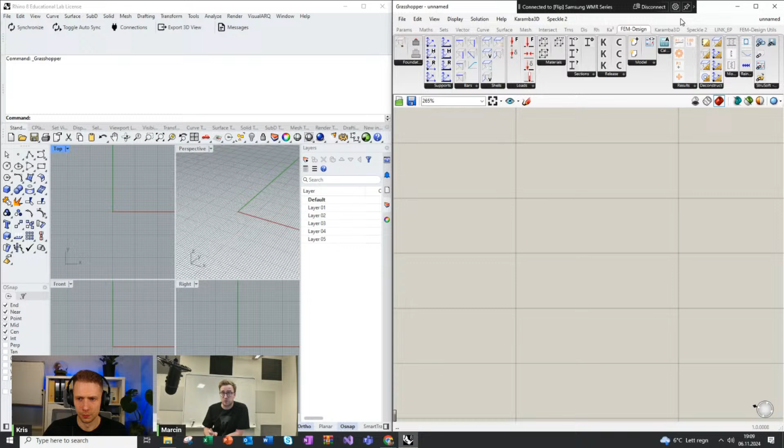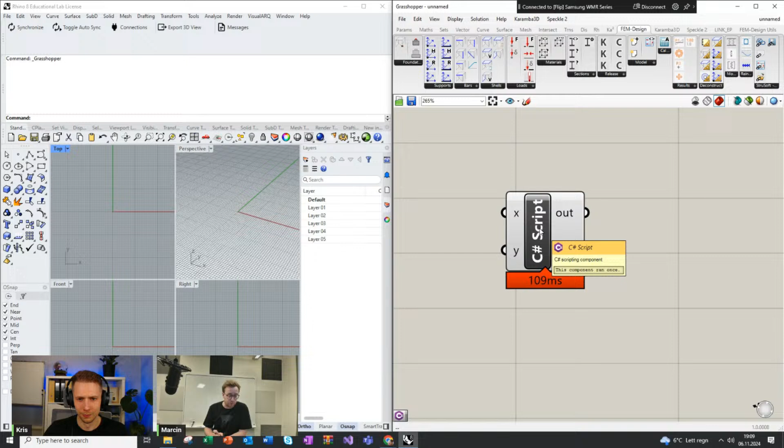Generally, you should not be afraid of creating code in Visual Studio. Probably some of you have been trying C# scripting or Python scripting from Grasshopper. I think the Visual Studio environment makes it much easier. So in fact, you will probably fall in love with doing it from Visual Studio, because Visual Studio in the new version is also learning your style of scripting. So after some time, it will try to suggest the correct command, which you can approve with the tab function. I will also show you that.

But let's maybe do it right now, step by step. So I will just close Rhino 8, close Grasshopper, of course, and I will just open Visual Studio. As Kris was mentioning, I hope all of you have installed Visual Studio. Since I am using it quite often, I tried to clean Visual Studio and Rhino of unnecessary plugins, just for the

purpose of this workshop. So generally, when you are starting Visual Studio 2022, it's highly recommended to run it as administrator. In my case, I could just click it because in the properties I marked it to always open as administrator. But remember to do it, because we will be saving the Grasshopper plugin file on our C drive, and to do it, we need administrator rights. So I will click it, and Microsoft Visual Studio 2022 will start to open.

Obviously, you don't have this part because these are the elements which I have, but probably all of you have those options on the right side of your screen. And what we want to do today, we don't want to clone a repository from GitHub or open a project which we don't have. We just want to create a completely new project. I hope all of you managed to install the extension for Grasshopper.

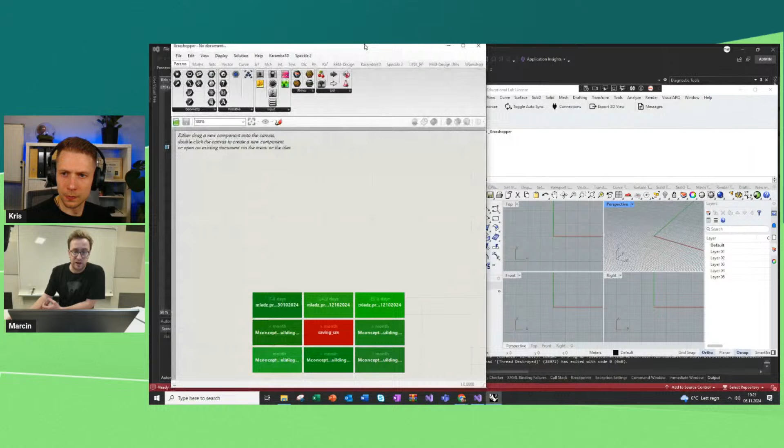If I click it, Rhino 8 will start to run. So you see diagnostic tools have appeared in the place of the Solution Explorer, and we see how much memory we are using right now when we are using Rhino. Rhino and Grasshopper are starting automatically. I'm not clicking anything right now. We are just waiting until it opens Rhino and Grasshopper. And what we also see is that we created our first ribbon. So the ribbon Workshop and Test is bringing us the Kris Workshop Component 2024.

So we already have something. And maybe it's not very meaningful and it's not having any input and output, but we have something. So exactly. Good start. It's a very good start. It's like the rocket has started. We don't know where it is aiming, but something is happening. We can celebrate already. And the display button in Visual Studio, it's because of the extension, right? Yes, it's because of the extension.

And then we don't see the icon, like the others have very fancy icons. I'm not sure if we will show it today how to do it, but it's also not so problematic to do the icon. But generally, let's try. Oh yeah, one thing. As you can see, we have also workshop test. So if I go over here, we see that the nickname is workshop test.

So generally, if I change the display into not draw full names, but the short names, then we have the workshop test. Okay. So if we change it, then it will change it also here. So I will keep to the draw full names. I like to keep it when I'm teaching people because the full names are there. So the workshop is the ribbon name. The test is this name here, test. And the Kris Workshop Component 2024 is of course the name of the component.

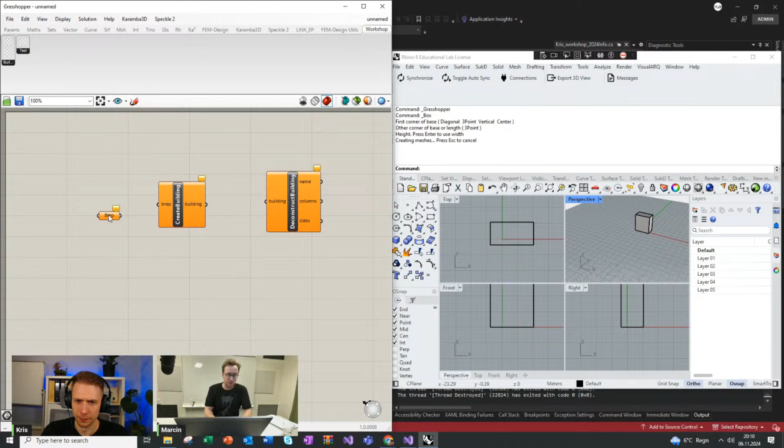And then if we go for the workshop, we see that in the building we have create and deconstruct building. So we have already 3 objects in our plugin. Let's go for the first one. We need some kind of input. So I will just create some kind of box. It's a brep, definitely. I will go for an easy one right now. I will set this brep and bring it to my building. And it's not red, so that's very good information.

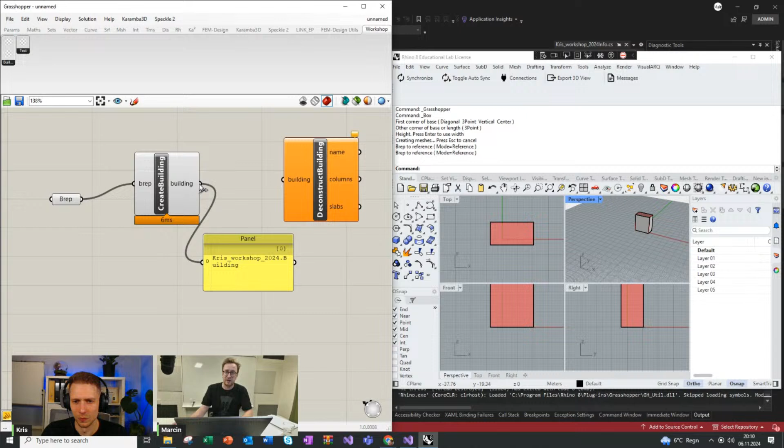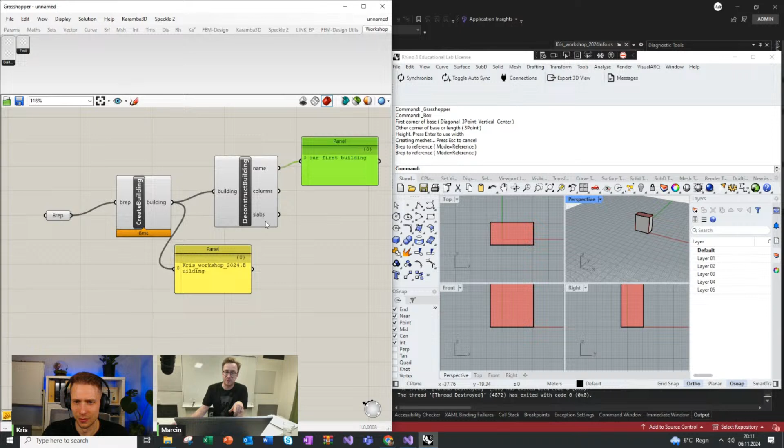What we can see in the output, it's also not a brep, but this is a Kris_workshop_2024.Building. So it's the first class name with the Kris, I suppose. So now if I go for the building and go for the deconstruct, it even works. As you can see in the name, you see our first building. You don't see any columns and slabs, obviously, because we didn't manipulate the geometry yet. But the goal today is to make the columns and the slabs automatically from the brep.

So right now, it should be quite easy to understand what we want to do. Sorry, it took 1 hour to present you the goal of the workshop. But yeah, I think it's quite clear right now what we want to do.

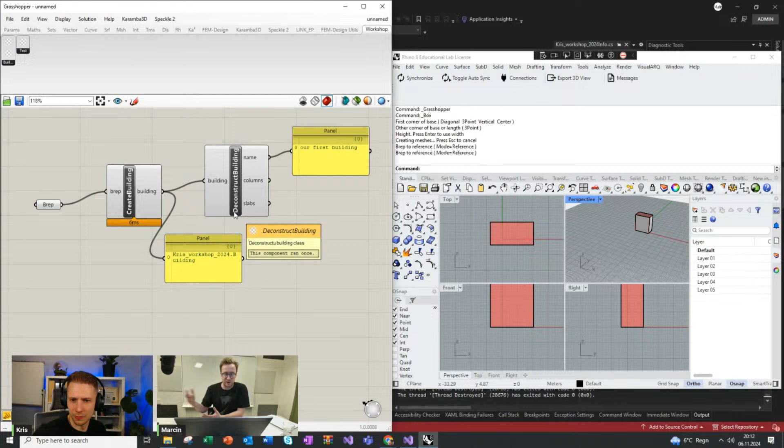And when you hover the mouse over the outputs, you can see that it's a brep, an icon of a brep. The same if you go to the output for the name and building. Here's the data, and here we have a text, a line, and a brep. So everything is working perfectly. And as you can see here, you have the description, which I was sometimes skipping, because here it's writing brep, which in a second will be a building. For the columns and the slabs, the name is already very communicative, so you don't really need a description. But if you want to create your plugin very user-friendly, then it would be nice to use it. So what we will do right now.

Sorry, again, can you repeat what that was?

So if the line is a problem, then probably you're generally missing this Rhino.Geometry reference. But I'll just break the system. I'll click break all, because then I'll be able to change the code. Now you see the application is in break mode. Then I can click either here on the building, or go into the Solution Explorer, and choose the correct place where I want to be. I'll go for the CreateBuilding.

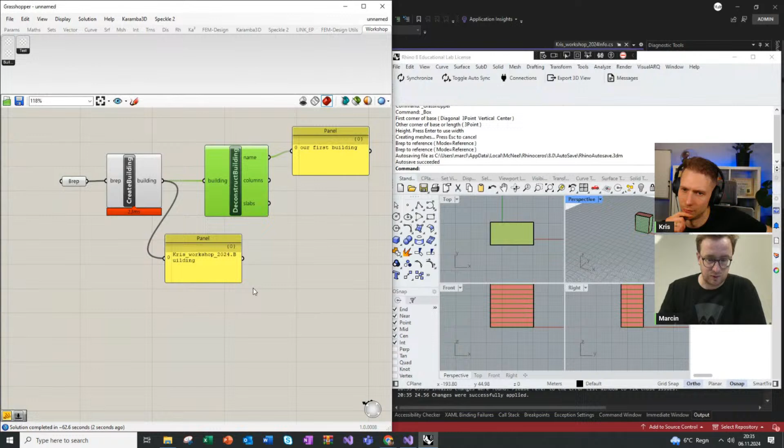So probably somehow maybe the first plane, or one of them, didn't cross the brep. This was probably the problem. I will click continue, recompute it, and already we see that we have slabs. So I will go back to the code to show you how it's looking, because maybe I was changing it too fast. So I made: if curves are not empty.

So if the brep plane didn't cut the brep, then it should be null, and you should not succeed with the further code. In fact, probably we should make another if statement for the brep create planar boundary. Every programmer would probably suggest me to do that, but I want to minimize the code and make it run.

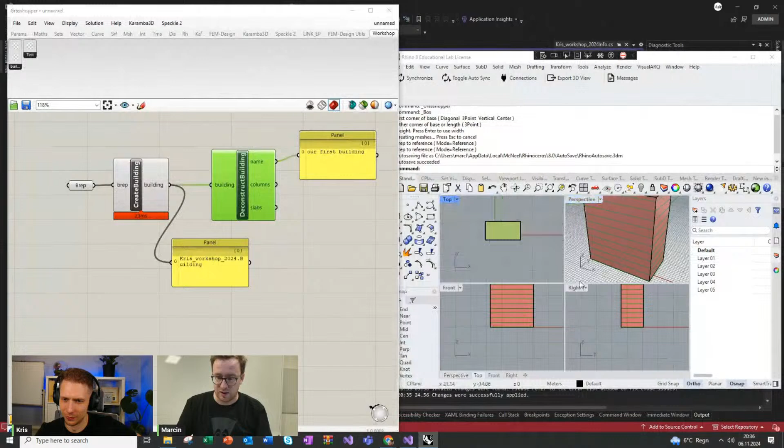And again, let's try to see in Rhino and Grasshopper, we have right now a brep which is this size. Let's just move it, we see that it's following. Can you just make the perspective view bigger? Yeah, let's make the perspective bigger.

And also I will go for another layer and generally turn off the visibility of the brep, so I will just present the slabs. Now you see I will just maybe change it to wireframe.

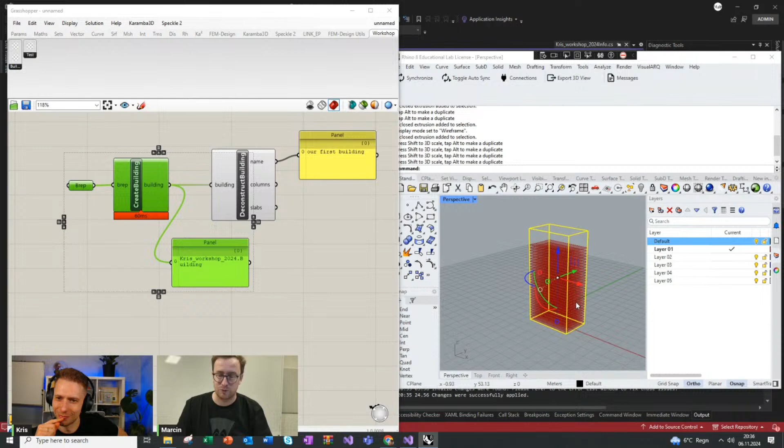Nice, so let's try to elongate it, let's try to scale it, let's try to move it. And probably one of the criteria should be 30 planes, so 30 floors. So we see that it's also working quite well.

And the next thing is, okay, what if I will make the geometry pipeline? I will take every brep from my layers and connect it here. And what if I will start to draw more of the buildings?

Nice, so it's working with that list as well. Yeah, it is, because it's treating every brep as a single item. So it should be a little bit changed in my perspective to have the list access, but it will be working.

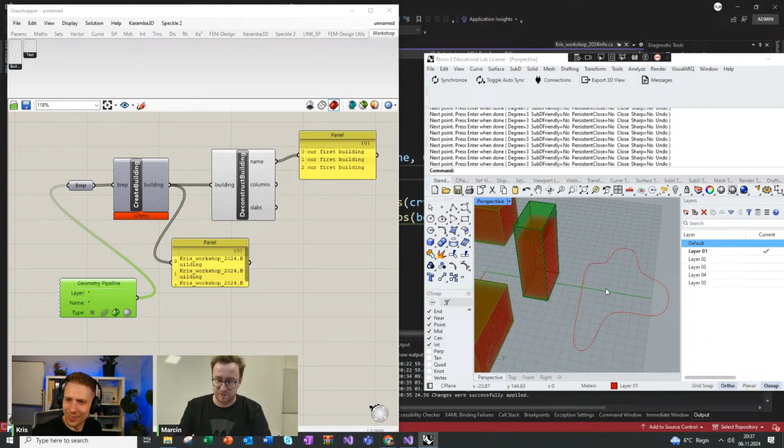Let's also try something more, let's try some more fancy stuff. Not just rectangulars and boxes. Let's take the curve here, set one curve, let's take the boundary, and let's extrude it.

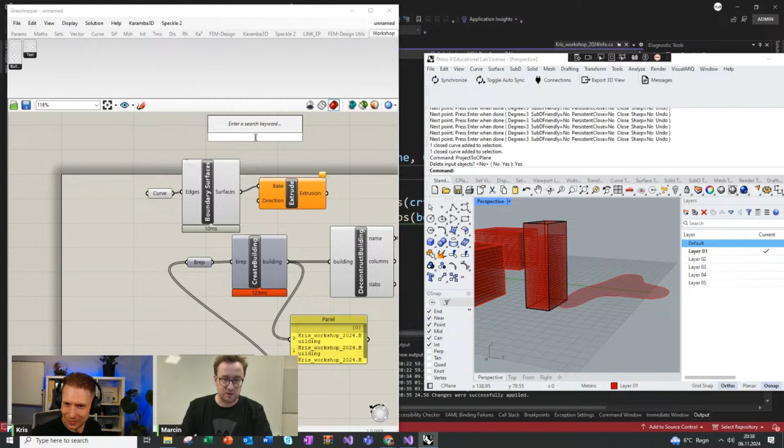Probably I was drawing in 3D. Project to C-plane will make the deal. The direction unit Z, and let's say I would like to have it for 30 meters, and we will have a slider.

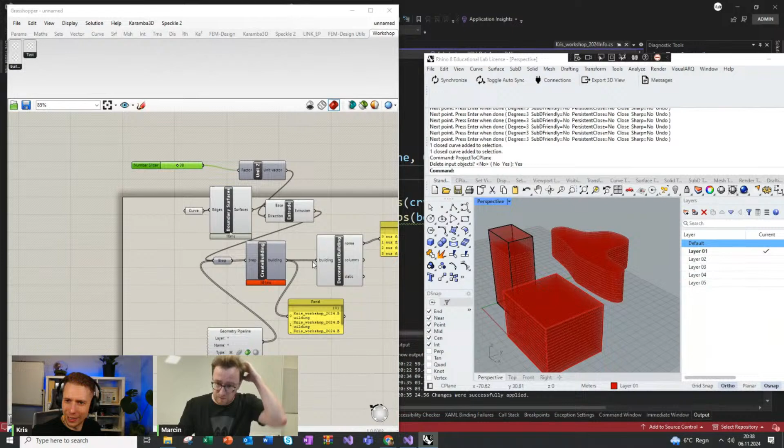So if I will connect it here, we see that it's also calculating, and then when we are changing it, it's also changing. So impressive, it's impressive that everything works. So good work on that.

Yeah, and as you can see, it's extremely fast. Probably the most demanding stuff, because probably if you will do it with the normal Grasshopper code, I don't want to compare it right now, but definitely it will be slower.

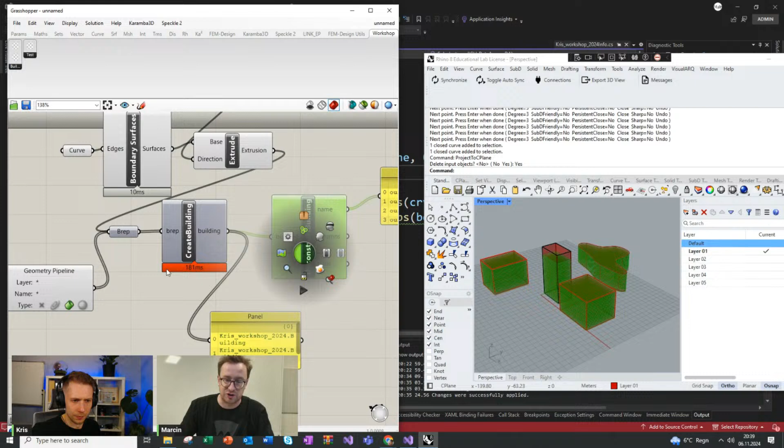And also the good thing about it is that generally until you deconstruct it and preview the breps, then probably it will be very, very fast, because previewing of the geometry is really taking most of the power of the computer. So if you want to make some operations like checking the height of the floor and so on, you can do it without previewing the geometry, if you want to test, for example, some other specifications. So previewing of the geometry isn't always expected.

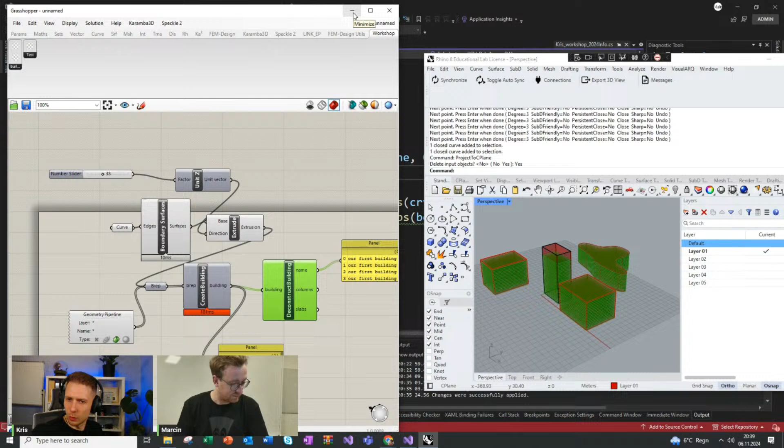But okay, we have still 20 minutes left. So for sure you have something more to present, or should we go to questions, what is the idea? Maybe, I don't know, because we can create the columns, which is generally an interesting code, but I'm a little bit skeptic if we will manage in 20 minutes.

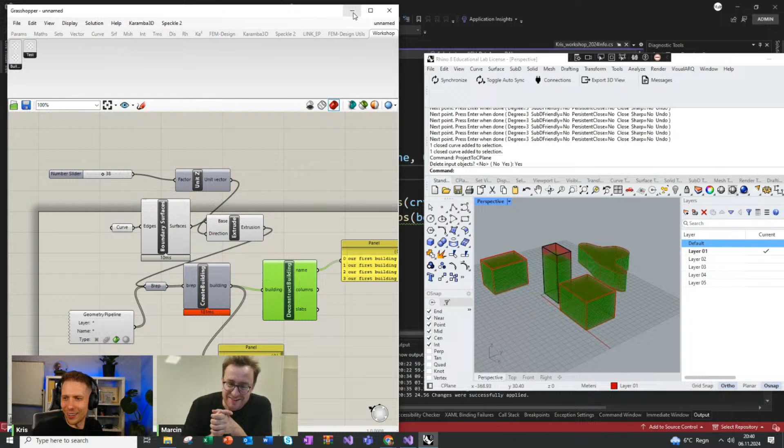Okay, so I have some really interesting questions, let's go to this one from Richard. Would you recommend first building the algorithm in Grasshopper, then porting it over to C#? It's a really good question, because when you were solving everything in C#, for me, everything you wrote as code, I had to translate it to how I would do it in Grasshopper with this component - brep, planes, and tolerances. So what is your practical view? Are you building some prototype first in Grasshopper, or with your experience, are you going directly to C#?

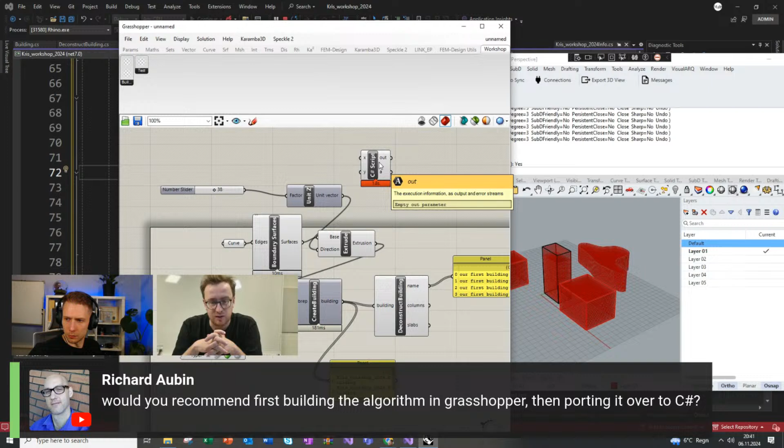It's a good question, and there is no simple answer, because it's not only about the experience. Some of the codes, when we are talking about some application of machine learning, some application of different libraries, not always you can use only Grasshopper. So there are some limitations in using the C# script editor in Grasshopper. So not always I can do the prototype, but whenever I can, I highly recommend to do it.

Especially in the beginning, when you are learning, it's really, really recommended to try something with pure Grasshopper, then maybe port a part of the code into the C# script. And then if you already have the idea and see that it's working, I would recommend you to do it in Visual Studio. Visual Studio, as you can see already, really helps you in creating the code, and creating classes is not really possible in other environments.

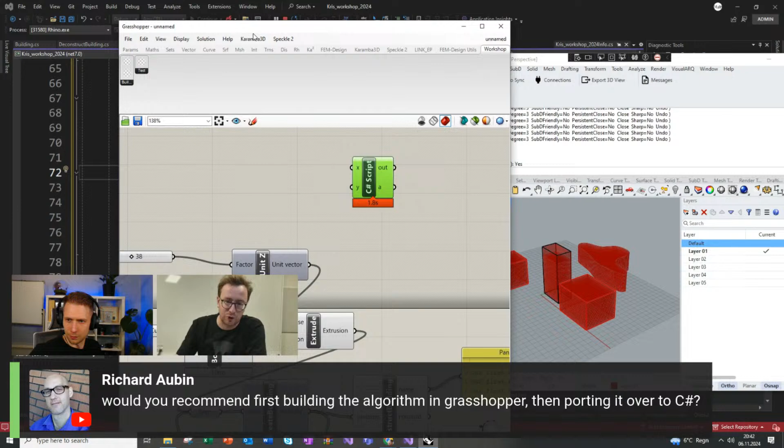So at some point, not everything you can test again, or create the whole prototype, in Grasshopper. So unfortunately, sometimes you have to go into pure coding, and wait a little bit until you see the effects, which is also very frustrating for me, especially because not all the options and instructions work exactly the same in pure Grasshopper as they do in C# in Visual Studio.

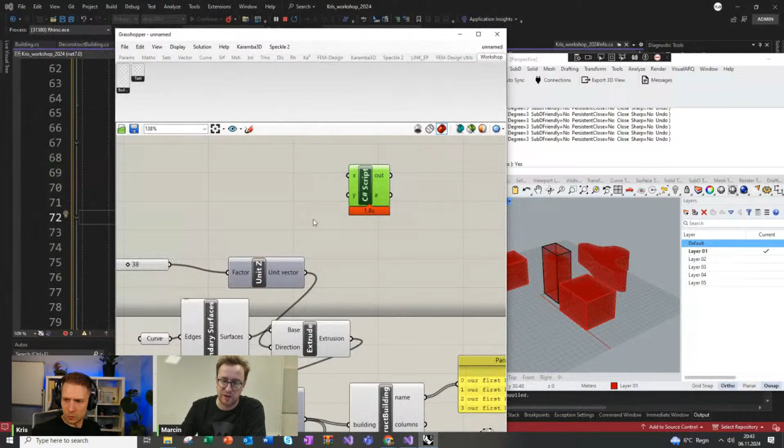But definitely, if you can, you should create the prototype in Grasshopper. So, from Mariia: what about using Visual Studio Code? Will it work here? I'm not allowed to install proper Visual Studio on my working computer. I'm not sure if you can use Visual Code; I never tried, to be honest.

So Visual Code, I can check, because I'm mostly using Visual Code for Python coding. And I don't think they have created templates for Grasshopper. So if yes, then it should be okay, but I don't think so, because Visual Code is a light version of Visual Studio, but I can check it.

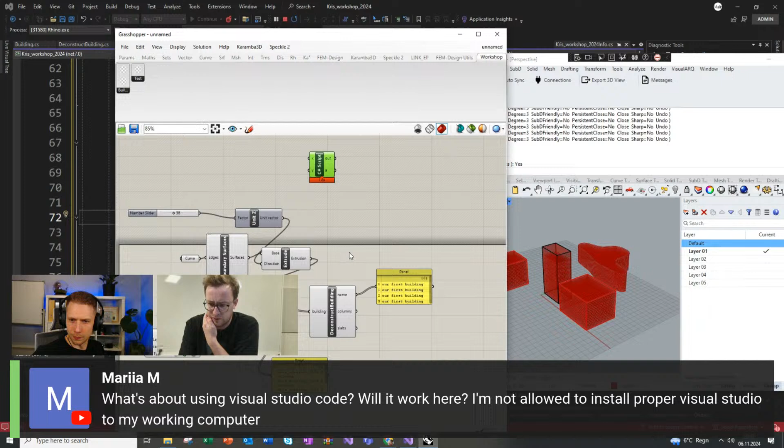So if you have any questions, please let us know. We still have 15 minutes, so we will try to answer the questions.